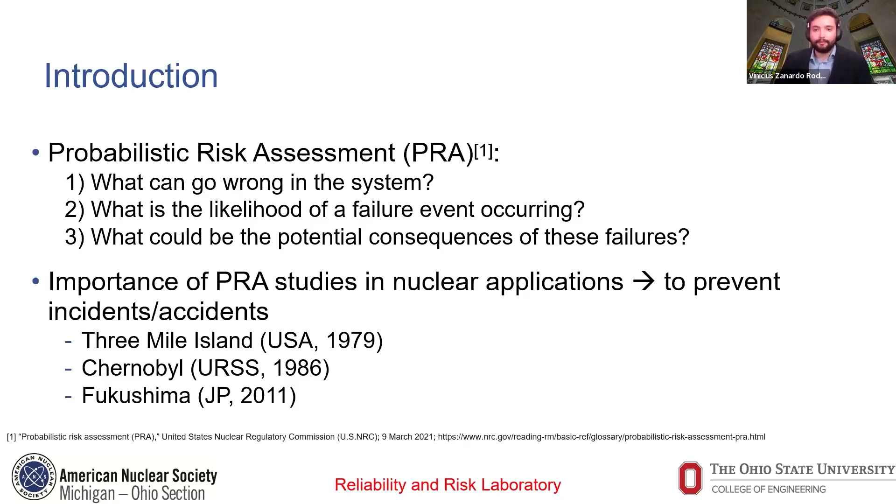So this is the point that I like to present to people. Why nuclear is so safe right now is, one of the reasons, because of probabilistic risk assessment studies that make sure that the technology is safe. So the current goal that the DOE and our university have is how to make the current fleet of nuclear power plants more economically competitive with the other sources of energy.

So going along with the Light Water Reactor Sustainability Program from the Department of Energy, our goal is how to make nuclear power plants flexible in operation and generation, to use the high quality steam that nuclear power plants can provide not only for production of electricity but other products that are highly valuable for American industry. For example, hydrogen, ammonia, desalination, and many other products.

So our case study at the Ohio State University is looking closely at BWR reactors and how to couple hydrogen production facilities with those types of reactors, taking advantage of the high temperature steam that nuclear power plants can achieve. So the importance and the motivation of our study is, okay, this is the goal, but how can we make this safe?

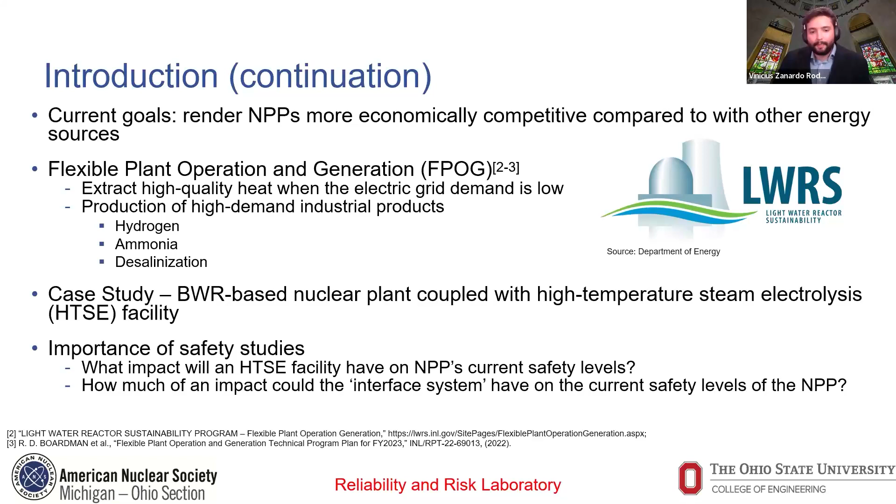So we are studying, and I will present in the next slides, how impactful it would be to have a hydrogen facility close to a nuclear power plant. What are the potential risks and hazards that those types of facilities could represent for a nuclear power plant, as well as, and this is the focus of this presentation today, the impact of the interface that will connect the nuclear power plant to the hydrogen plant. This interface will extract heat from the main steam line, and what it could represent to the reactor itself. So let's go to it.

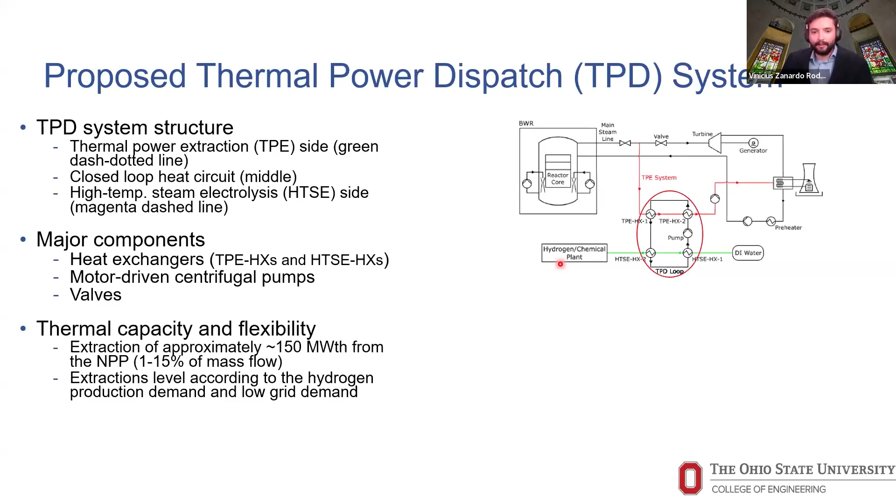So in our proposed system, we have the BWR reactor design. The goal is to extract heat, exchange heat, and send this heat to the hydrogen facility. So the system that we are proposing is a thermal power dispatch two-phase loop, where this heat exchanger warms up water and sends high quality steam to the hydrogen facility.

So our system is decomposed into three major parts. The TPE, thermal power extraction system, that is connected directly to the nuclear system, a loop that provides this heat exchange, and the HTSE side, which is technically the part that connects to the hydrogen facility. Looking into this design, we have major components, for example, heat exchangers, pumps, and valves.

Looking specifically at this design, we are planning to be able to extract between 1 to 15% of mass flow. So it will be a flexible interface as well, so we can operate at different levels of power. Operating at 15%, we'll be able to extract 150 megawatts thermal, specifically for hydrogen production. When the demand for electricity in the grid is low, we can send this part of the power to another use.

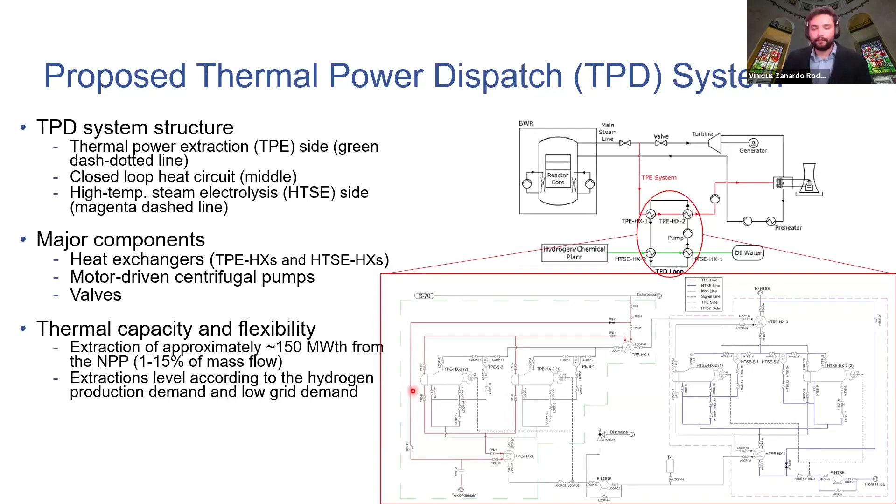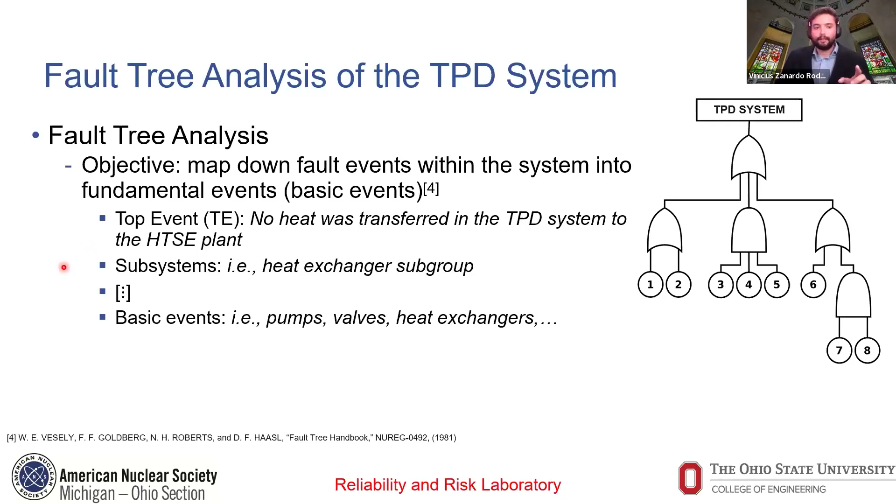So going further in the research, we investigated how reliable our design is. In the fault tree analysis, we start to map down from a main point, a top event. In our case it is no heat transferred in one of the locations. So we try to understand, going levels down in the fault tree, where failures could happen, and how these failures can trigger the top event. So we start with the top event, go to subsystems, until we arrive at basic events.

So mapping down the system that we have, we see many locations where failures can happen that could potentially trigger the top event. For example, heat exchanger subsystems, specific valves, pumps, some of those components.

So the methodology that we used to develop the fault tree, like I mentioned quickly before, is to systematically break down the system level by level until we reach basic events. So we did this following the thermal heat flow, to make it easy to understand how the system works, looking at the most prominent points for failure of components until we reach the basic event.

For example, a pump failed to run or failed to start, a valve failed to open, close, failed to control as well as per operation, or in the case of a heat exchanger, tube rupture or leaking, some point like this.

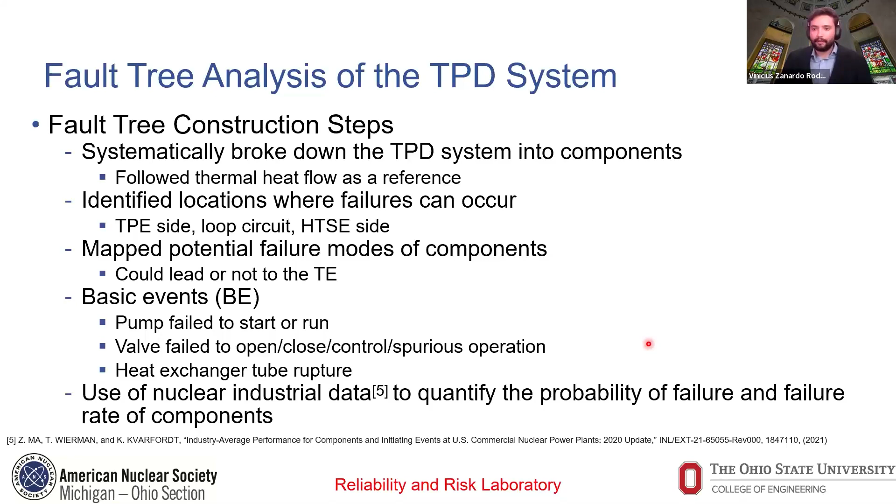But before we dive into the deep calculation, we made some assumptions to get the analysis started. So one of the assumptions was the system is under a single demand, which means that when the system is allowed to be online, all the pumps, all the valves will be under just one demand. So you open or run or start. We are not assuming that you close again, which would generate one more demand.

The mission time of the whole system will be over 3,000 hours, which we assume will be 25% of a normal refueling period of a BWR reactor, which is normally 18 months. And inside of our system, we have 500 feet of pipes. In the case of a failure of a component, we are not providing repair. So just to see how reliable the system is without repair in the case of failure.

So to perform the reliability calculations, we use SAPHIRE. SAPHIRE is a software developed by INL. It's one of the best software for reliability and risk analysis. And so in the case of the basic events with failure mode per time, we use this type of calculation; per demand is another type of calculation, just to agree with the data that we have.

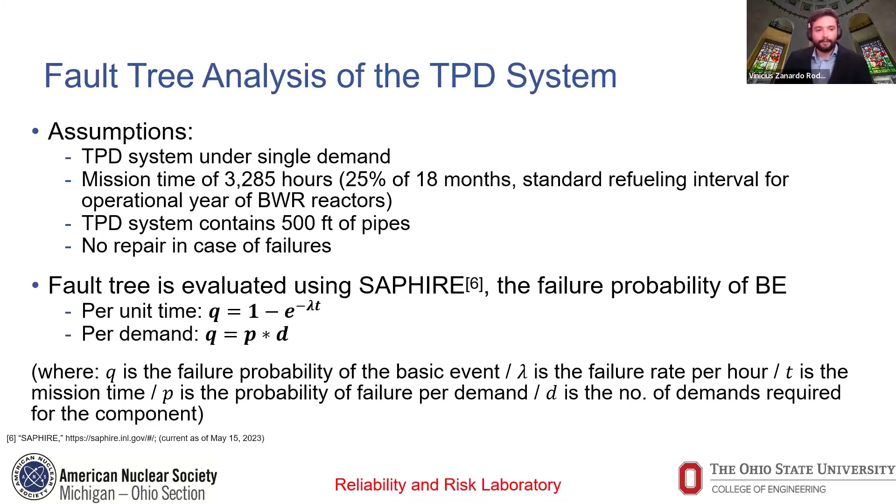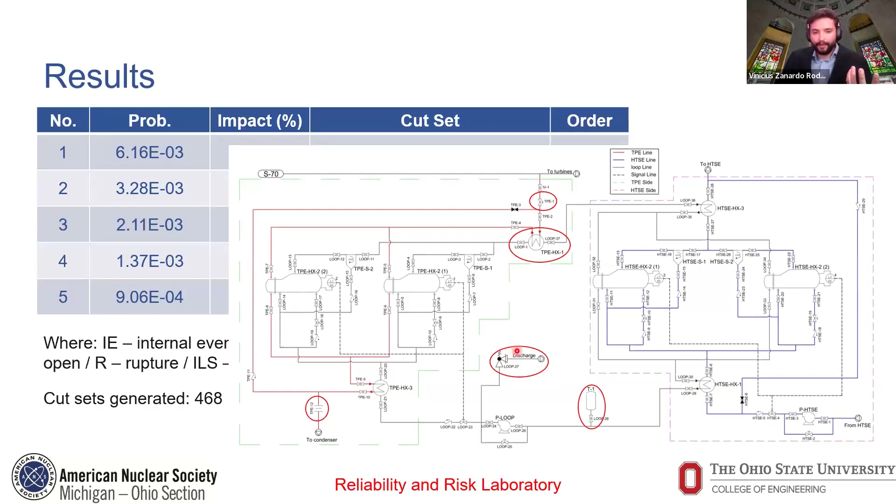So going to the discussion, we emphasize that right now we only performed one single demand, one single component failure, which means that the component fails by itself. We didn't consider at this point common cause failures. In the case that a component was maintained by a crew, another valve close by was maintained as well in the same way, but a mistake was introduced during the maintenance. But this is a point for future work. At this point, we only focus on a single component failure.

As well as the system intermittence, we make scenarios where the intermittence of the system going online or not is different. In our case right now, we simulated with one demand, but in the real world, with the TPD operating in a nuclear power plant, the levels of demand, so the intermittence of the system, would be higher.

As well, we measure the single failure criterion in the case that one component was not able to perform its safety work or performance, what could go wrong in the system and how this failure could propagate. So in the case of loss of coolant in the TPD building, the contamination of this coolant, as well as in the case of a leakage, for example.

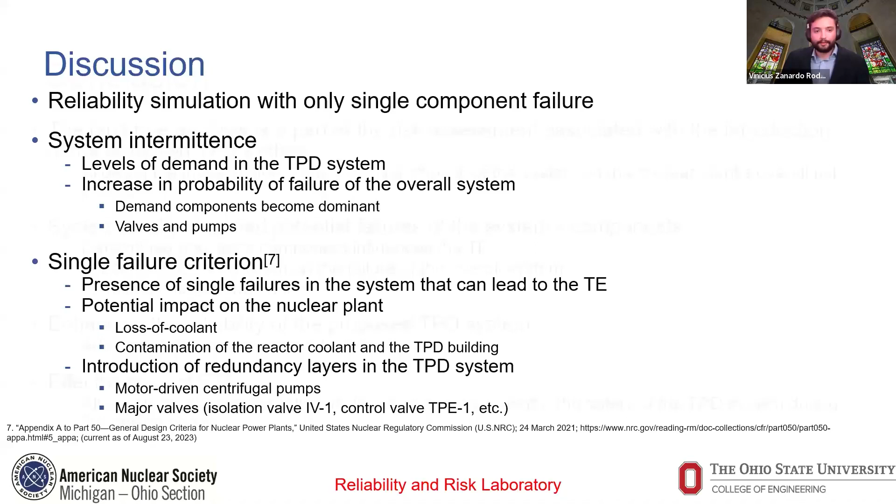This analysis also allowed us to see where redundancy of components is necessary to increase the reliability and potentially increase the safety of the system as well. For example, strategic pumps, strategic valves, components like this.

So the conclusion to our work was that fault trees are a really powerful analysis to understand how risks can originate in a system and how we can address the system during the design phase. Another point was where failures can happen, how failures could happen in our system, and how we can introduce redundancy levels to augment the reliability of the system as well. So by identifying critical points where failures can happen, and if they happen, how impactful they will be.

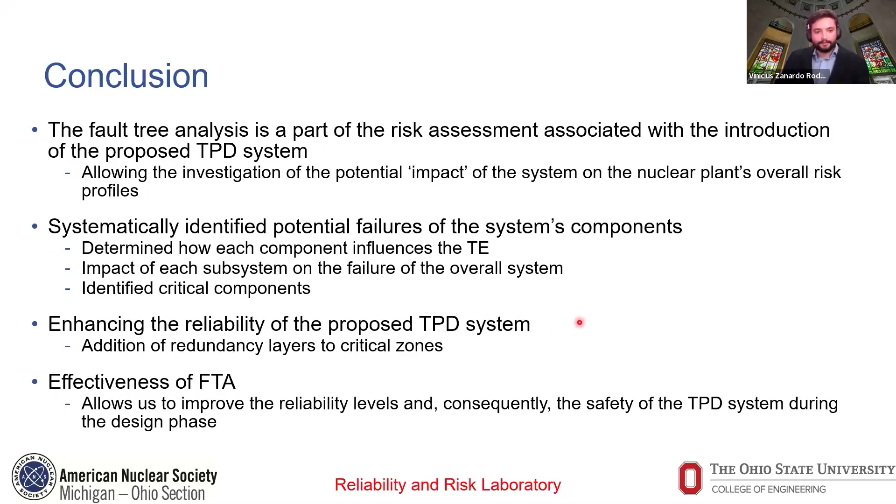So the future work, most of this is already performed. We are already writing a paper on this. It is to investigate common cause failures. So how those types of things, when components fail at the same time or in a really short time, could impact the whole system. According to the main literature, this is one of the most impactful failures in nuclear applications because of the redundancy layer that we are required to include in the system, as well as what locations, because of the redundancy, CCF events could be more prominent. For example, heat exchangers, pumps, similar valves that are close by.

And the current future work that we are performing as well is to expand the PRA analysis. So how our system impacts the overall system in the nuclear power plant. So we are looking at event trees. If our system fails, how the other systems will trigger to diminish the failure. Understand how the system could impact, for example, core damage frequency or large early release frequency as well.

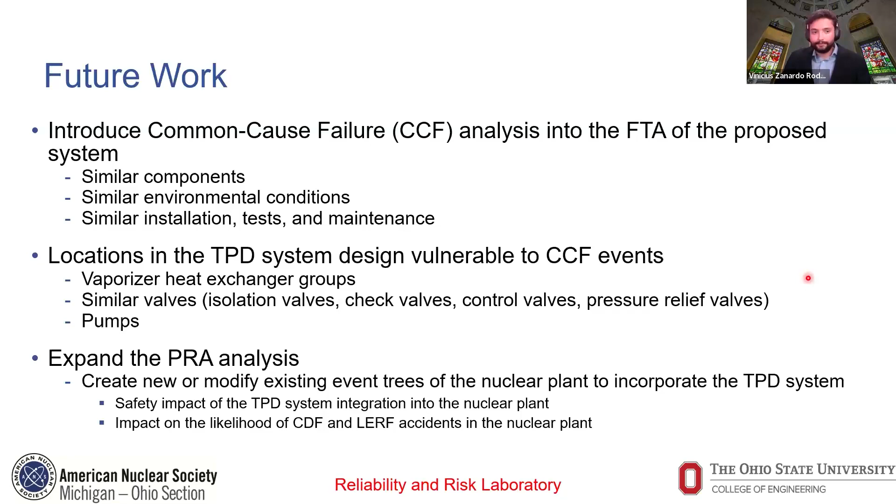So we acknowledge DOE for the Nuclear Energy University Program for partially funding this project. The first author also acknowledges Ohio State University for the fellowship that I received in my first year. And the authors also acknowledge Dr. Shi from RPI for his contribution in the thermohydraulic development of the TPD system that I just presented.

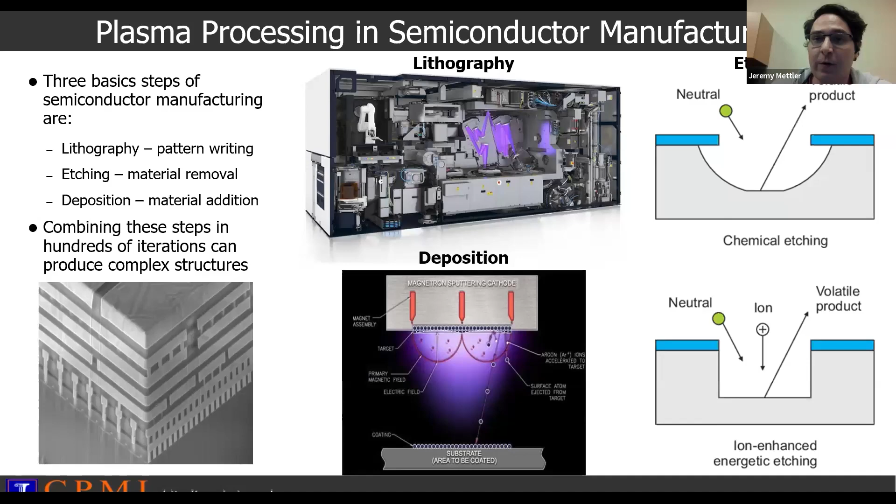For this talk, we're going to focus on etching, the removal of material. Traditionally, etching has been done using chemical processes like acids to remove just chemically material from a surface. However, the downsides of that are that it produces these isotropic etches where you get this kind of bowl shape forming. And that's not very well suited to making fine structures like what we need on a computer chip. And so we incorporate plasmas to provide energetic ions, which can help to produce nice, sharp, clean walls like you see down there in the bottom right.

And it's the work of both the ions, which provide the anisotropy, but the radicals, which actually do the etching, they produce the volatile product that allows you to remove material from the wafer surface. In the case of like a silicon etch, for example, you might use fluorine radicals to form SiF4, which is then removed. And the key is that you want to get etching to proceed uniformly across the whole computer chip. You want to be able to make sure that the devices near the edge of the silicon wafer work just as well as those near the center. And for that, you need both a uniform distribution of ions and radicals reaching your wafer surface.

Ions are relatively easy to measure. They're charged particles. There are lots of different techniques for measuring the population of ions in a plasma. Radicals are highly reactive and very, very short-lived, and they're neutrally charged, and so they are a little bit trickier to measure. Historically, they've been measured primarily using spectroscopic methods. However, the downside to that is that it is not spatially resolved. And so you can get a volume average of the radicals in your process, but you can't resolve how many radicals are at a given spot. And so it's difficult to ensure from a design standpoint that you're getting a uniform flux of radicals across an entire workpiece. And so the goal of this work was to try to investigate to see if we could come up with a way to measure radicals in situ and in a way that's spatially resolved.

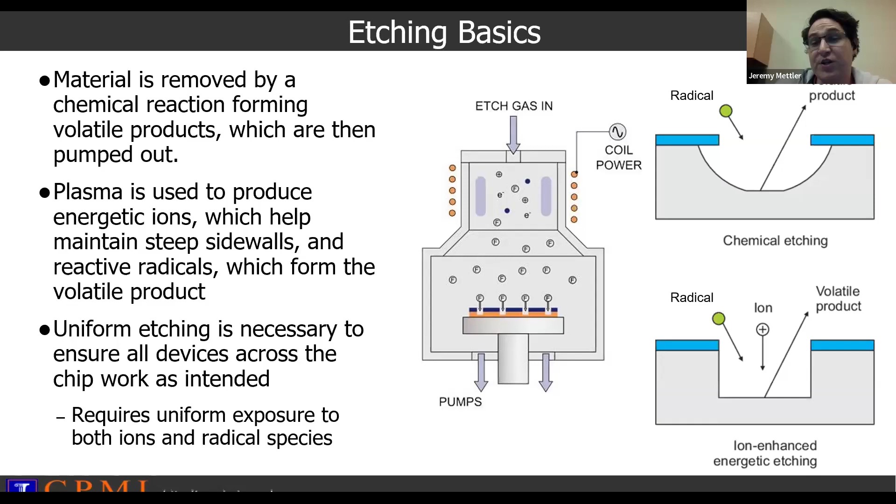But this has not been applied to fluorine in the past, partially due to the intensely corrosive environment that's found inside of fluorine plasmas. They like to etch lots and lots of different metals, so it's a pretty punishing environment to put an intrusive probe in. And also the fact that somewhat counterintuitively, while fluorine reacts very readily with metals, it actually has a relatively low recombination rate with itself. And so it has a low tendency to actually undergo this recombination reaction to form F2, and that can make it a little bit tricky to measure.

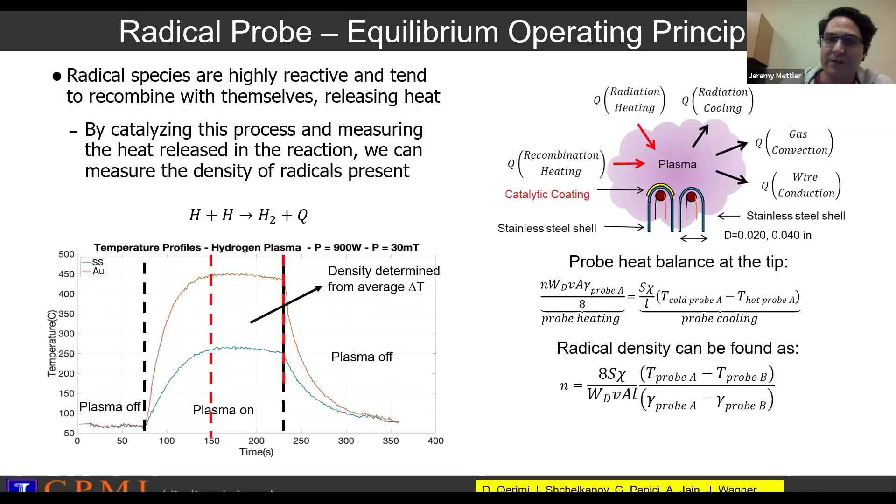But despite these caveats, we set out to try to apply this concept to fluorine. And so to that end, we built a chamber that we could introduce a couple of different fluorine-containing gases in, both SF6 as well as NF3. And we have a plasma source on the top, a helicon plasma source. And we can run this chamber at a variety of different pressures and flow rates and plasma powers.

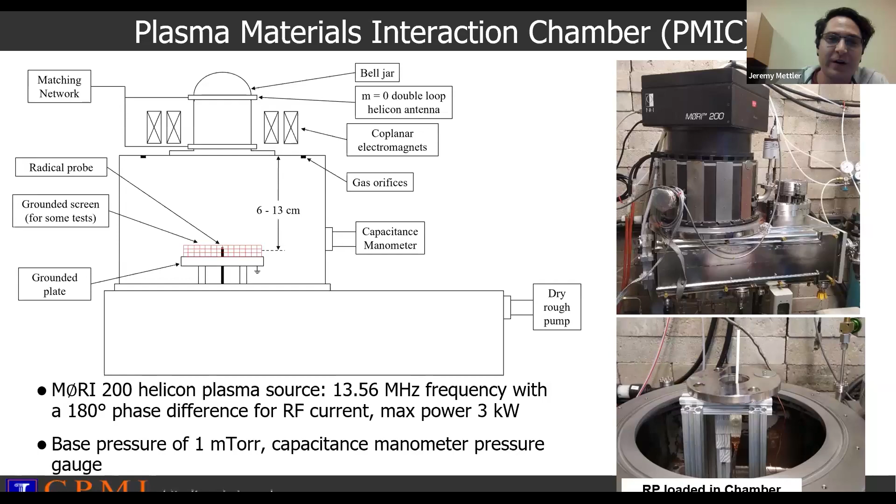And we sought to see if we could just at first find any material that might be suitable for acting as a catalyst for this fluorine recombination reaction. And I'll spare you all of the materials that we tested that didn't work and just jump straight to what we first saw had some promise, and that was actually gold, just like with hydrogen. And so here's an example of some of the results we obtained with the gold and an alloy probe next to each other in an SF6 plasma.

The first run here, number 1, is just a plain argon plasma, so there shouldn't be much recombination or any reaction going on the gold surface. And then 2 through 7 are an increasing power scan. And so we see, as we introduce SF6 to the plasma, the temperature difference between the two probes increases as a function of the power. And the power is a good stand-in. As we raise the power, the density of the fluorine should increase as well. And we actually can measure that using the spectroscopy I mentioned earlier.

And when we compare the difference between the temperatures of the two probes and the density as measured by actinometry, we get generally the same trend across the power range we've scanned, although you can tell that as we get to higher and higher power, the rate of increase of the temperature difference seems to fall off a little bit there, just as the fluorine density is increasing. So that's a little bit curious, and I'll talk a little bit about why we think we see that later on. But generally, we're seeing a trend that's promising.

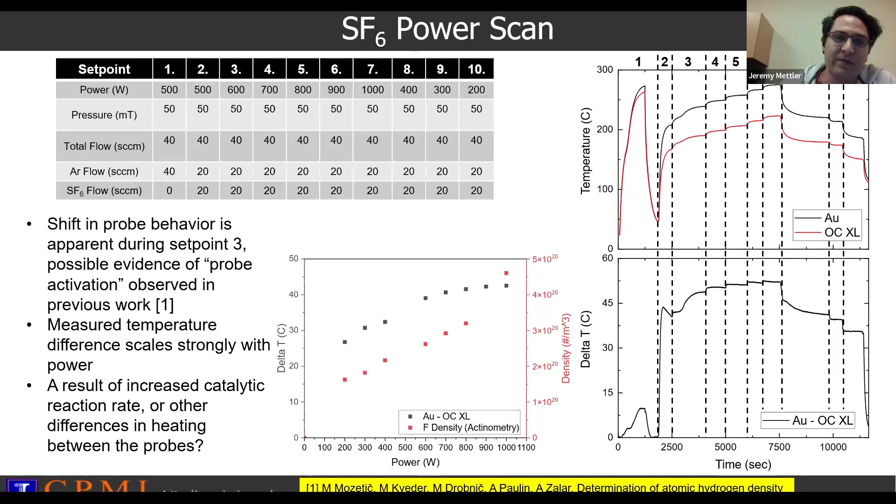Some bad news is that, unfortunately, the environment is quite punishing, and after some time, anywhere between 3 and 15 hours, depending on the probe, we were noticing that the probes were failing. The temperature difference between them would suddenly start to collapse and then go to 0. And we suspect that that was due to deposition happening on the probe surface. And so we tried sputtering, applying a bias to remove that material from the surface. And while we were able to restore some activity, it wasn't a foolproof way to recover the probes.

So that, coupled with the issues we saw in getting agreement between the radical probe and the spectroscopic measurements, led us to reconsider a few things. And so the first one was, in all the previous examples I've shown you, we evaluate these radical probes at thermal equilibrium. So we let the temperature run out until both the reactive probe and the non-reactive probe have reached a steady state of sorts. And this is fine in probes that have a long lifetime. You could run some long scans and measure each condition, but since the lifetime of the gold seemed to be quite limited, we wanted to try to optimize how many measurements we could take for a given probe. And so we looked at ways to analyze the probes off equilibrium.

And so if you consider what the system looks like as you have the plasma on and then suddenly extinguish the plasma, you can come up with a few heating and cooling terms. If you group the heating terms as radical-driven and non-radical-driven heating terms on the catalytic probe, and you assume that those extinguish rather quickly as the plasma is extinguished, which they do because all the species are very short-lived, you can come up with this relationship where you relate the slopes of the curves now, instead of just the temperature difference, the difference between the slopes of both a catalytic curve and a non-catalytic curve to this overall heating term due to radicals, which then in turn should be proportional to the density of the radicals in the vicinity of the probe. So that helps to address the shortened lifespan.

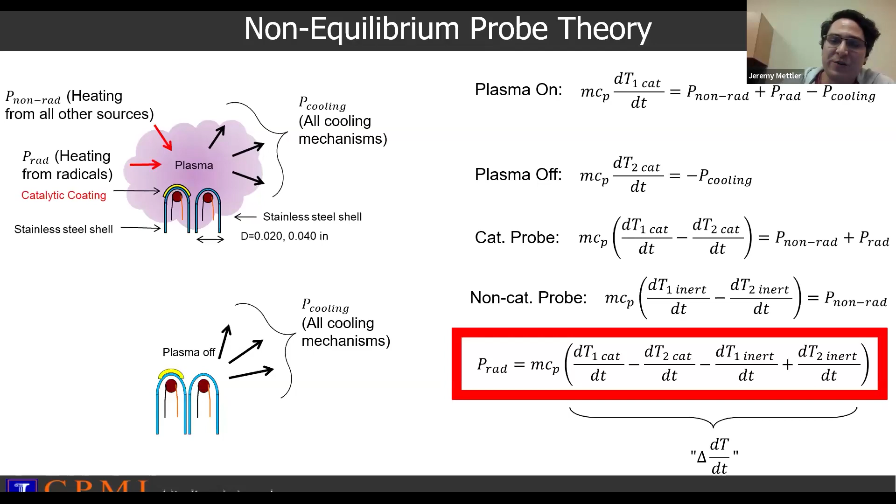So rather than use gold, we decided to switch gears a little bit. We're in a very strong etching environment, so why not try to measure, instead of a recombination reaction which fluorine is particularly bad at, an etching reaction instead, which is also an exothermic process.

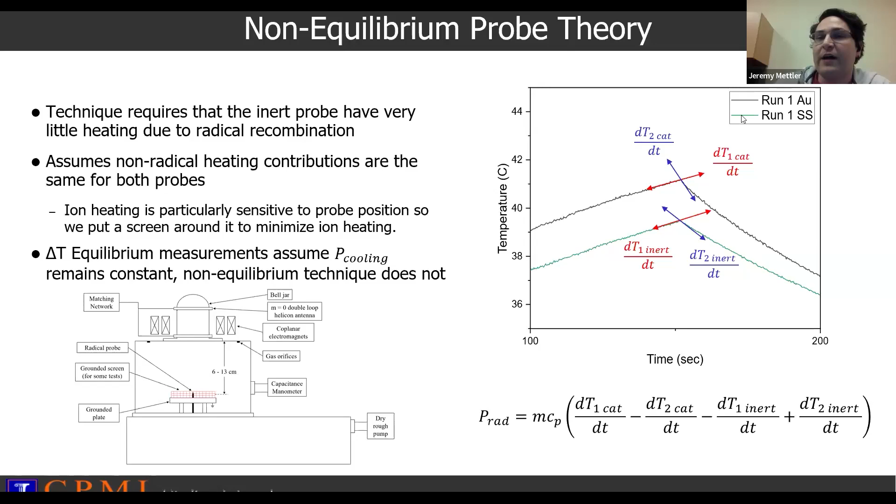So just taking a step back to take an example of what the non-equilibrium measurement would look like: we take the slopes here, which is well suited to an etching probe. And then instead of just a thin coating of tungsten, we apply a large pellet of tungsten.

So this was really encouraging, that we're actually able to measure not just some side radical of SF6 like SF5, SF4, etc., but actually the fluorine itself, because we're getting response in not only an SF6 plasma, but in an NF3 plasma, like what we would expect according to the density measured by spectroscopy.

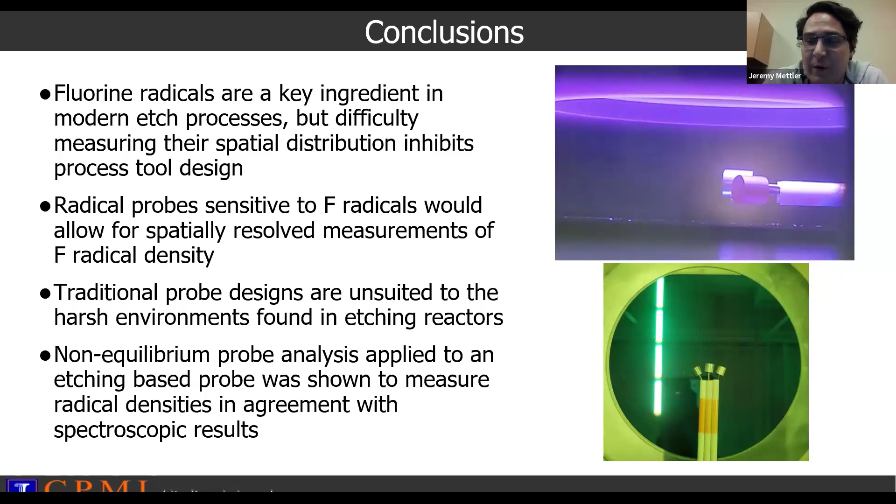So thank you all for your time, and I'm happy to take any questions that anyone might have now.

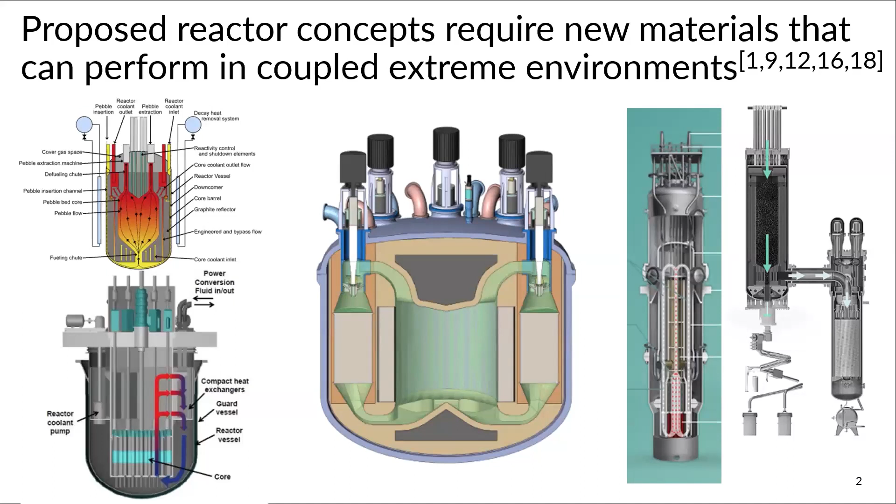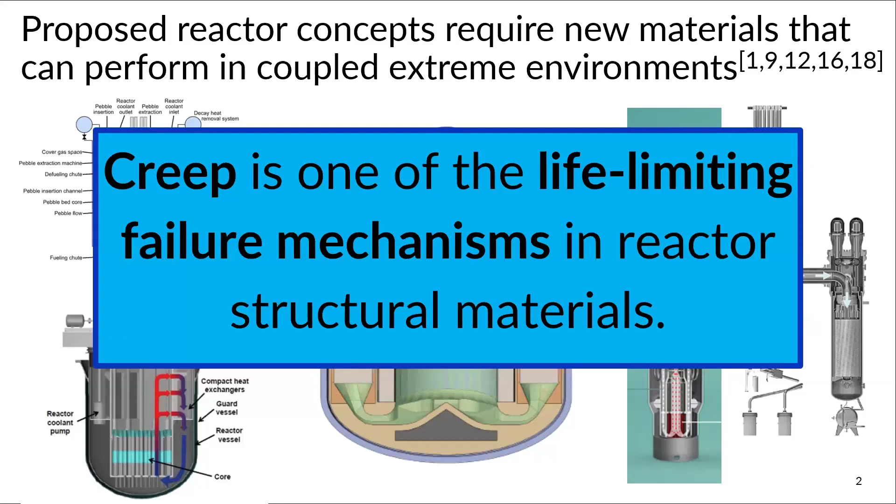However, one of the primary mechanisms of failure is creep, and it is actually pretty detrimental, and in the regulations, that's like your life-limiting factor. So if you don't know what creep is, it's... oh goodness, why am I blanking?

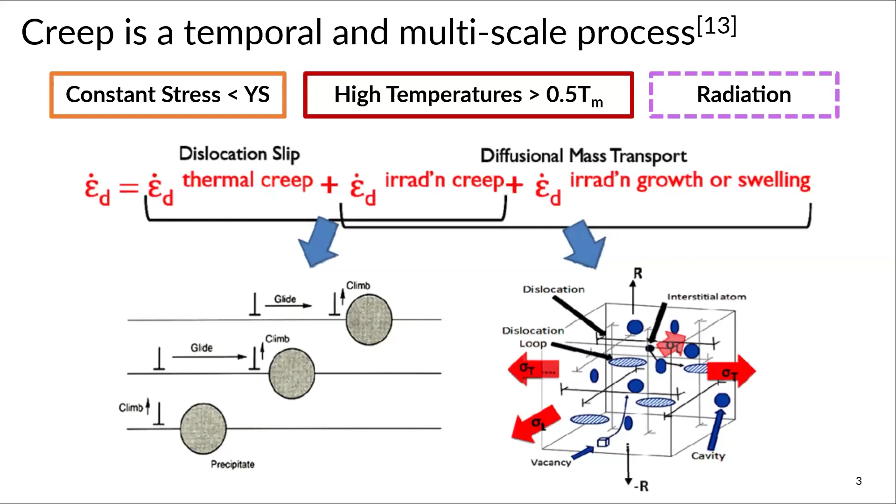In a lot of cases, radiation creep and irradiation swelling are interrelated, because radiation introduces point defects, like interstitials and vacancies, and swelling is this accumulation of vacancies. So a lot of the time it's hard to deconvolute the contributions from each.

This is a deformation map of 316 stainless steel. Based on your normalized temperature, which is your operating temperature divided by your melting temperature, and your stress, the applied stress on the y-axis, it's a function of temperature and applied stress. In each of these regions there are different dominating mechanisms. However, in irradiation creep, this regime has about 6 or 7 proposed mechanisms, so we don't fully understand what actually happens. That's my focus here.

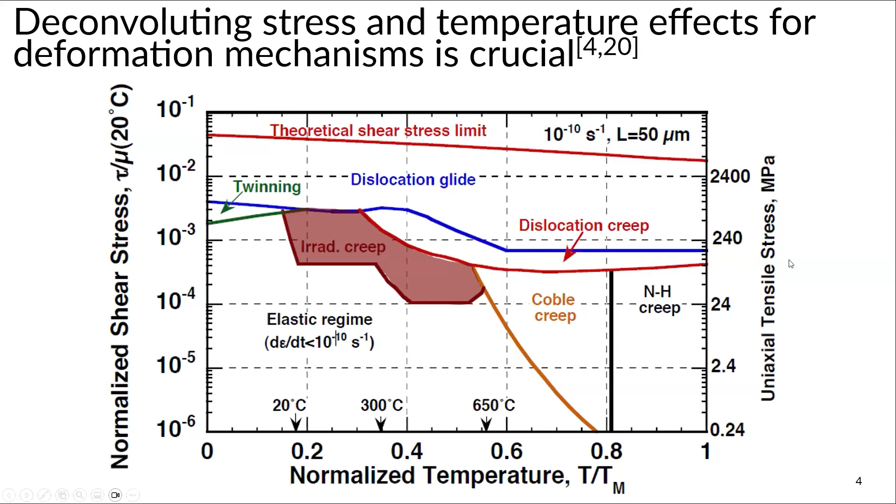However, I was really interested in the physical reaction, so the microstructural reaction - what does it actually look like? When you try to find what happens and what that looks like, you have significantly less microstructural data. They say, oh, this is your strain, this is the dose it went to, this was the temperature, but nobody actually really knows what that looks like on a microscopic level. So that's what I decided to focus on.

Before I run any of my experiments, I have to do a characterization of my as-received material. 316 stainless steel is primarily an iron nickel chrome alloy. I purchased 25 micron thin foils, and then I made sure of the thickness, the sample thickness, the grain size, the orientation, etc.

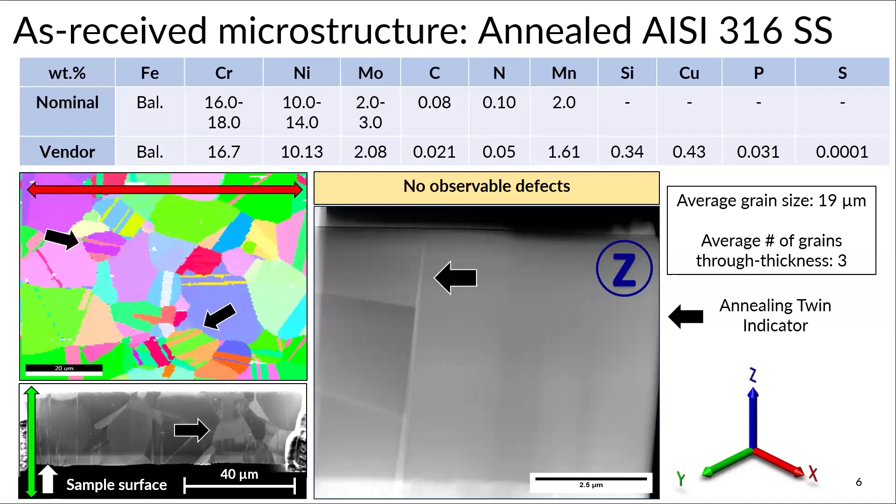In the rainbow picture with the red arrow going across it, that's an EBSD map, electron backscatter diffraction. It basically tells you which orientation your cube is of all of the grains, which will be important later. On the bottom left you'll see the sample surface and the thickness, and it verifies that it is 25 microns thick. In the large image in the center, that is a TEM micrograph, basically an electron micrograph, and you'll see annealing twins, which are formed based on the heat treatment and annealing process.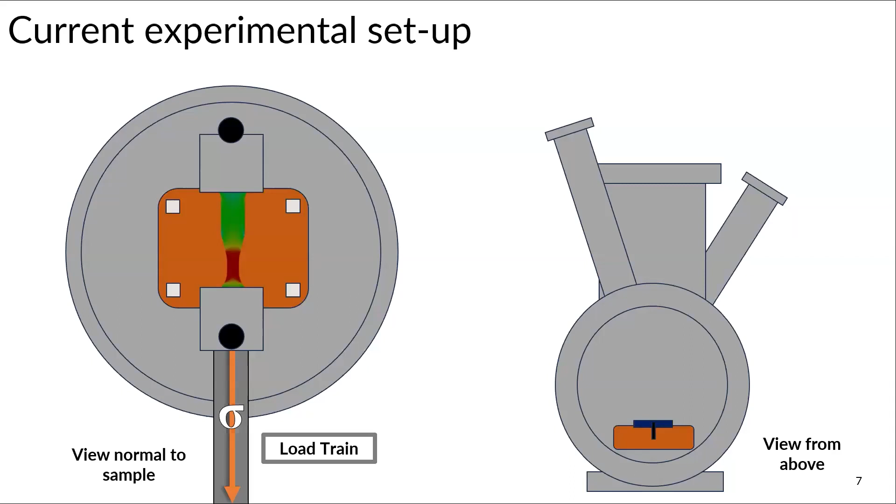There is no medium between the sample and the copper block to conduct heat, which will come into play later on in the presentation. I use 3 MeV protons to irradiate. And so for the nomenclature imagery, I'll use the X symbol, kind of like how they did the magnetic field, signifying into the page. That's the direction, which will come in handy.

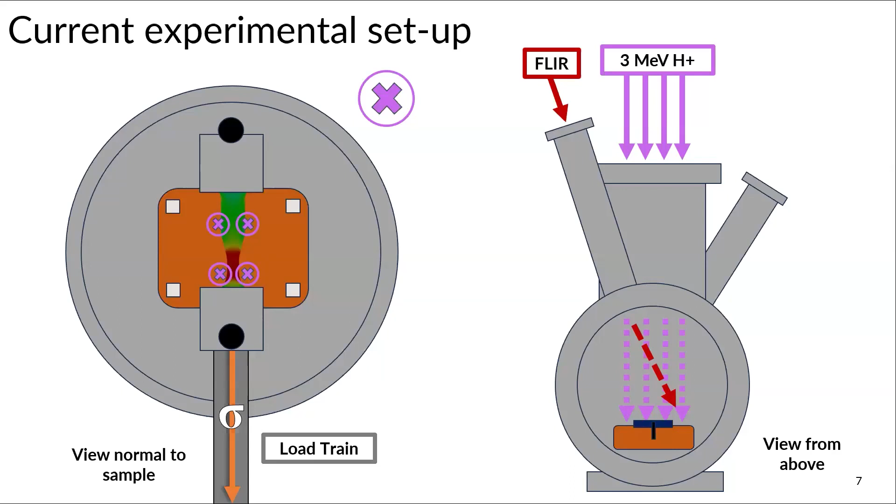So I irradiate it normal to my sample surface, and then I do a preheat of my sample for 16 to 18 hours beforehand so that my thermocouples can come to temperature and the rest of the chamber can come to temperature, because we can't actually weld anything to the sample or else we're introducing defects. So temperature measurement is kind of difficult. But we do a preheat, and then we'll calibrate our IR camera, which we then use to track the temperature throughout the rest of the experiment.

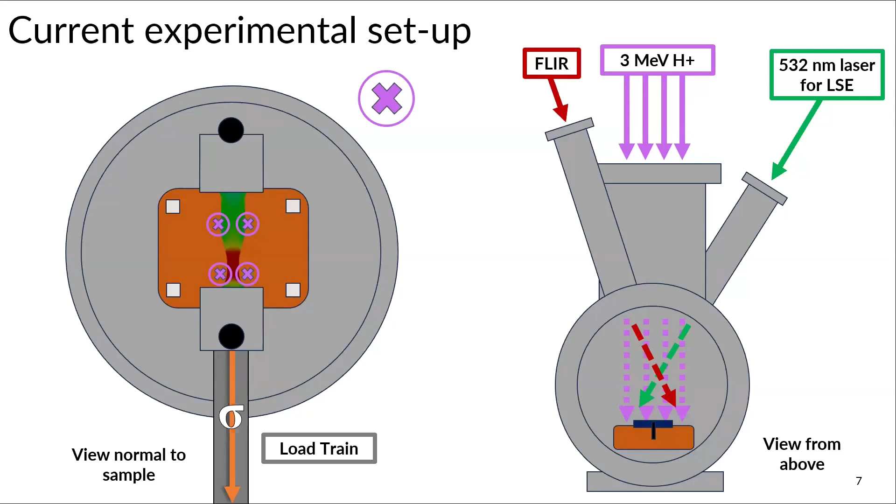And then for the strain tracking, we have the capability to do in situ strain tracking. So I roughen my sample surface with 4,000 grit sandpaper so that it creates a variable topography. We shine a 532 nanometer green laser at that surface. So when it's reflected back into the camera, it creates this black and white contrast, in which we can then have specific areas of interest circled on our sample, and then we can track the strain that way. And so we can track localized strain basically throughout the entirety of my experiments.

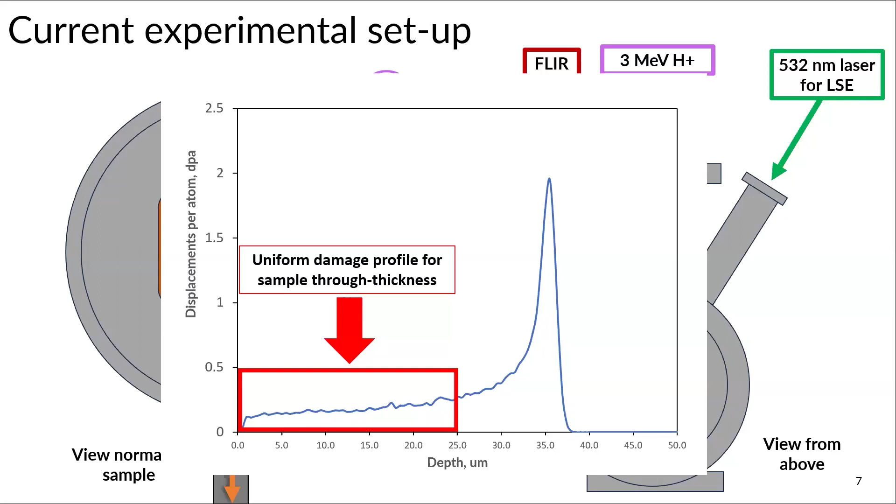And the reason I use 3 MeV protons and also super thin samples is that we want a uniform damage profile through the thickness of my sample. And in order to achieve that, you can do that when you have 25 microns, at least less than 35 microns thick. So it's incredibly challenging to work with, because that's like a quarter of the thickness of a human hair.

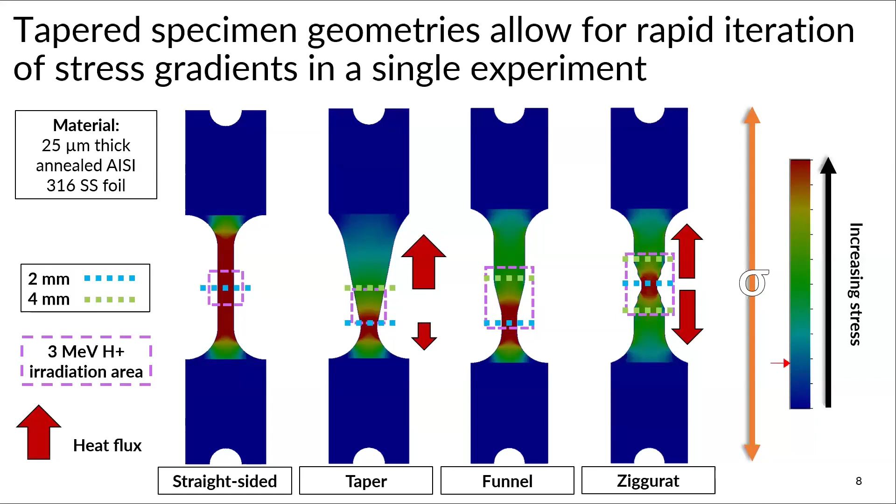And the reason we did that is because in the first two experiments, we had a significantly smaller radiation area. And we realized with the taper specimen, the heat flux and the heat flow throughout it was quite uneven. On the first tapered experiment, we ended up having a temperature spread of like 150 degrees C, and that's kind of hard because you're really only supposed to be changing one variable. So we're hoping that with the ziggurat's geometry, it will be able to have an even heat flux through the center and then up and out in both of those directions.

So I have two experiments that I'm going to talk about. The purple dashed line is our beam area. The first experiment was our first taper one, with an average temperature of 511 with a significant variation of 77 degrees C. That's our IR camera in the middle, and then the strain tracking on the far right. The bottom right shows a much better picture of the speckle pattern that is created from our laser speckle extensometer. And then I plotted my contributions to the deformation map, and you'll see that they popped up on the right.

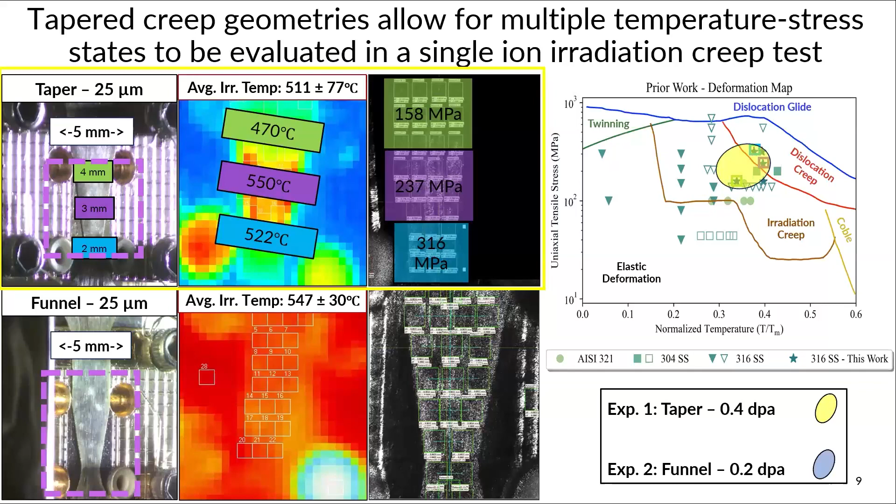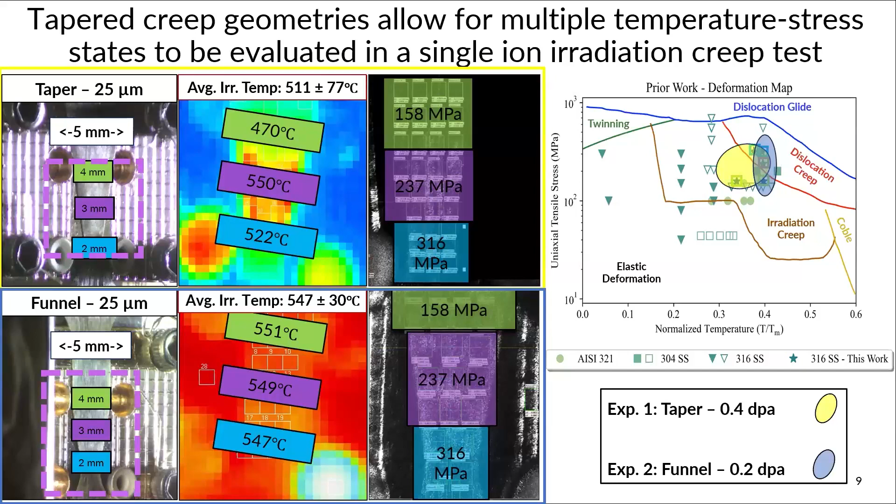And the microscopy aspect, I'll just be focusing on this experiment. It was irradiated to 0.2 dpa. So basically, it's really important for the microscopy aspect. We know that there's loops and dislocations that form on habit planes or close-packed planes in FCC structural material. So what we do is we irradiate. We then see our electron backscatter diffraction, pick a grain that is oriented in the direction we want it to. We targeted 110 just as an initial part.

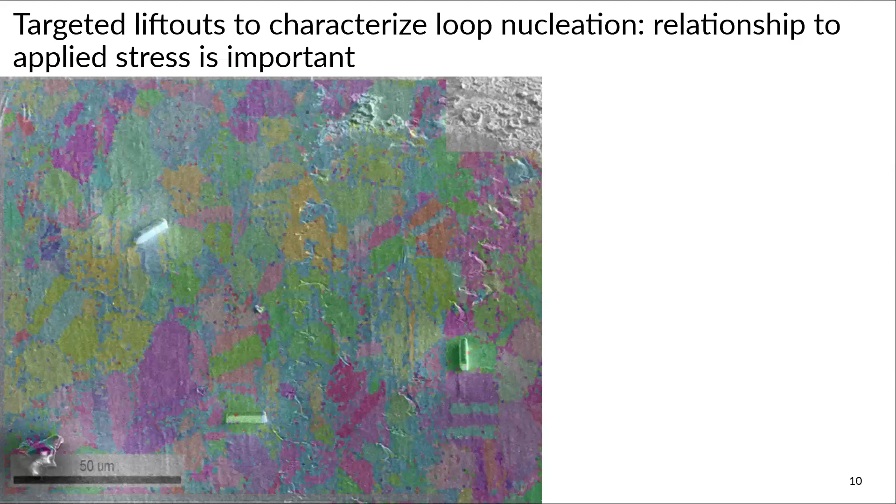So I did lift-outs perpendicular, parallel, and at some sort of degree in relation to the stress. So the stress in this case is like the y-axis. And I'm only going to talk about the lift-out that was oriented 35 degrees to the axis. So on the right-hand side, we expect to observe multiple different types of loops. So perfect loops, which are atoms that basically conglomerate, or come together and literally form loops. And those are not going to have any contrast in the middle of them.

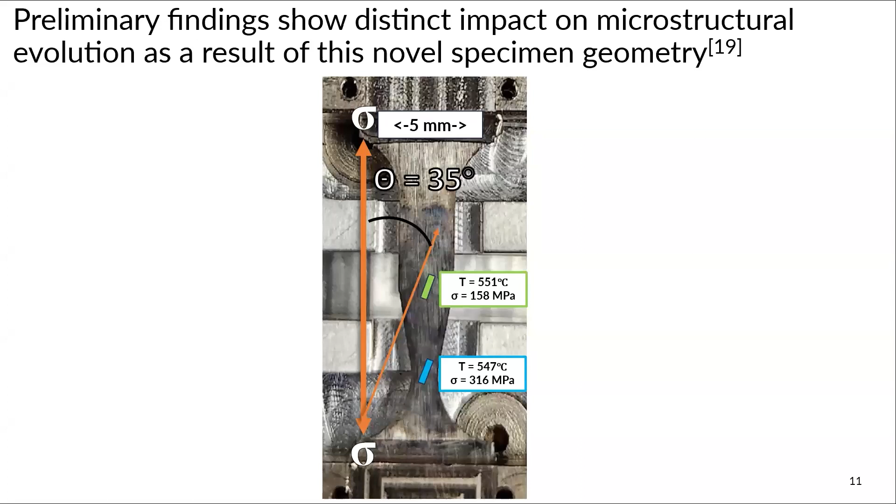But then we have faulted loops, which are like stacking faults. So you've got these loops that come together, and then it's like a bunch of interstitials within that loop. So it's usually dark or light, whatever way you look at it in the TEM. And so for preliminary findings, the whole purpose of this was to see if we can generate multiple data sets from one experiment. And you can see we have very few dislocation loops that are traveling on the 111 plane. That's the primary slip plane in FCC material. And they're going towards a grain boundary, which is a sink. So dislocations and defects will go towards sinks.

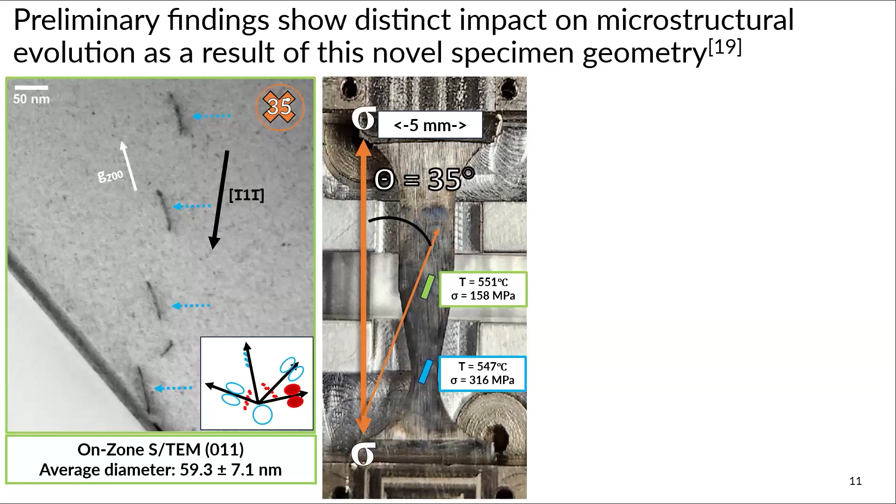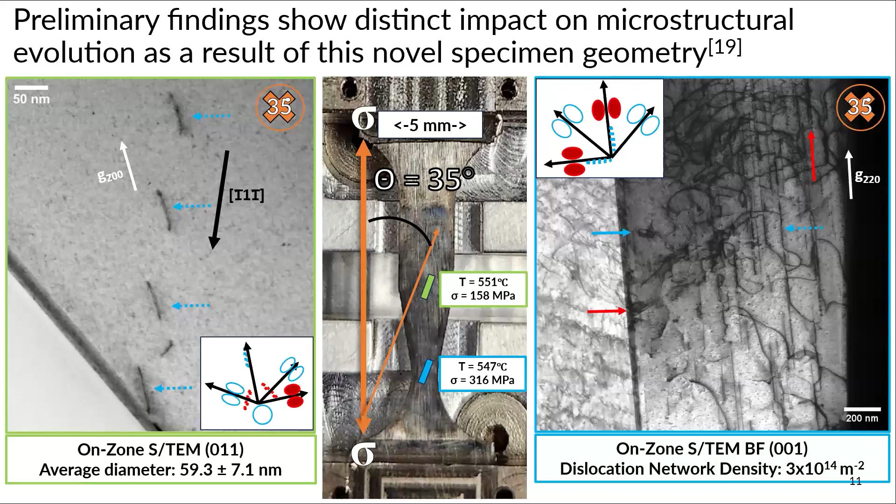And then on the same sample, in a totally different area, in the higher stress area, you have this significantly increased dislocation network. You have a bunch of various different types of loops that are showing up. And so there's different orientations for all of these, and I won't go into it because we're short on time. But basically, this proves that our sample can generate multiple data sets. Whether that is inherent necessarily to the specimen geometry, we'll figure out.

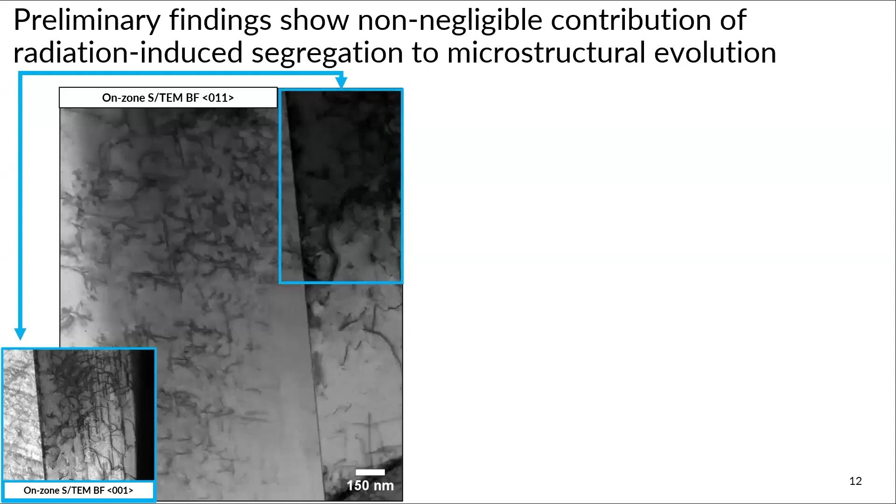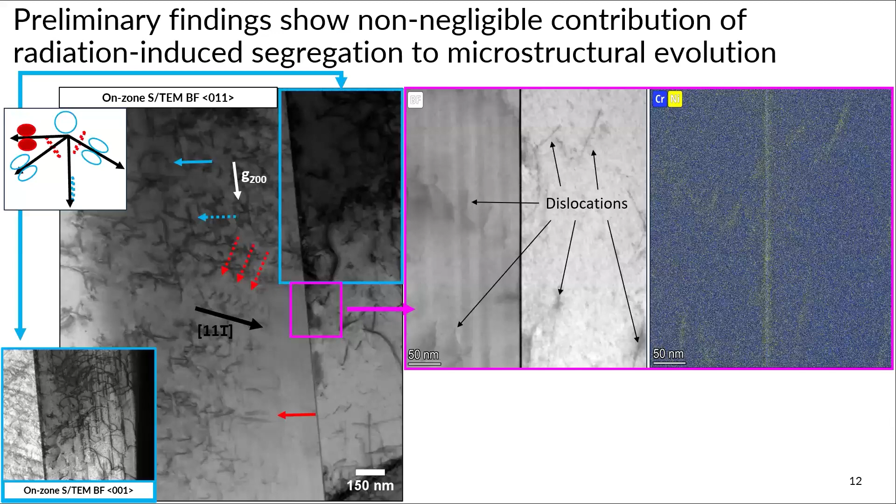This is the same grain as before, and so I found something pretty interesting. I found these dislocations going towards the grain boundary, and what I did is a microchemical mapping. I basically wanted to see the chemical composition of what they were, because in literature it shows that there is nickel silicide precipitates forming, and so what you see is that there's nickel along the grain boundary and then covering all of those dislocations, which proves previous findings. And so we think that there is some type of microchemical aspect that contributes to the acceleration or deceleration of the creep rate overall. And so that will be further pursued.

So in conclusion, basically, with these geometries, we can generate like 3 times the amount of data in one experiment, which therefore accelerates finding all of these mechanisms out. And then these microstructural results are being used to build a robust database for crystal plasticity models. So crystal plasticity is the stress-strain relationship in your crystal. And so if we know what happens on a microstructural level, like density, size, orientation, it can help build these models and therefore predict at what point this material fails.

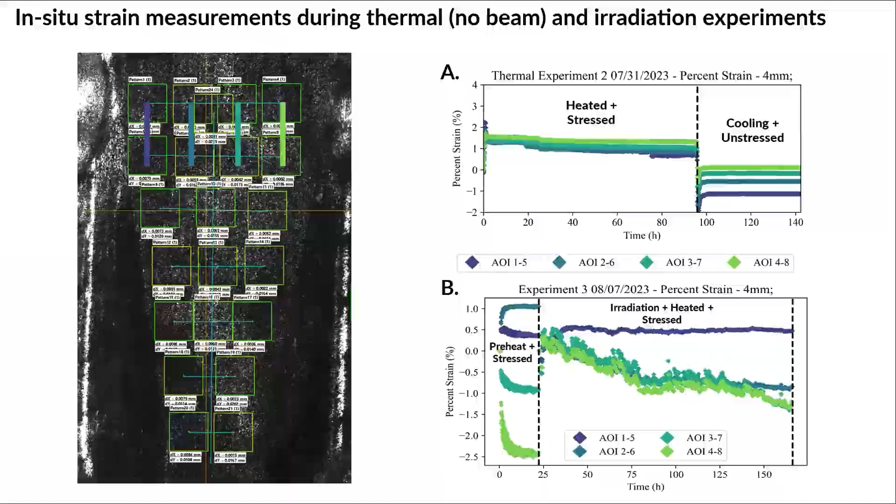Well, Mackenzie, thank you very much. That was, like you said, a lot to take in there. There's a lot of work on your part.

I have a quick question. When you said microchemical analysis toward the end, how do you do that on such a small specimen? Yeah, so you put it into the TEM, so that's the transmission electron microscope. So we basically take these things called lift-outs. You use focused ion beams to mill it out of your bulk material, the specimen that I've irradiated, then you thin it down.

The lift-out images that I showed were about 130 nanometers. So basically you make it electron transparent, and then you do energy dispersive spectroscopy, I believe that's what it stands for. It's EDS. Basically it measures the energy loss, and based on the chemical, the periodic element, it's going to have different losses because of the interaction with that nucleus. So it'll map all of that out, and then you can select what other elements you'd want to see. I could have done one with silicon to see where the silicon was, but that's kind of how we do it. They take about an hour and a half to have good statistics.

That's interesting. It's amazing that you could do that in such small samples. It's so cool. That's part of your tool set there, but for me, that's a revelation. So thank you for the explanation. Yeah, of course. Eric, do you have any other questions for Mackenzie?